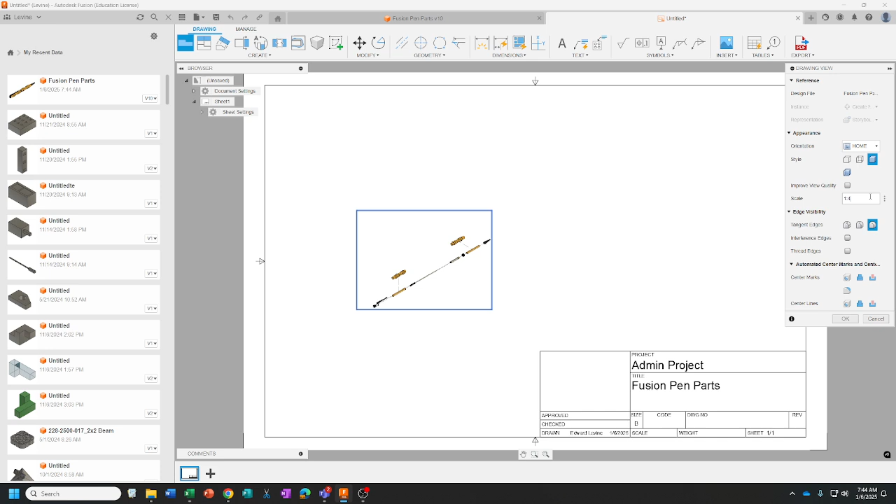If you've ever done an assembly from a set of directions, you'll have received something that looks like this. I'm going to make this a little bit bigger. Whatever paper size you're using, try to use the extent of the paper, but this is not going to work because that's too big. I could try to shift it, but we need to leave ourselves some room. Try to stick to whole numbers here.

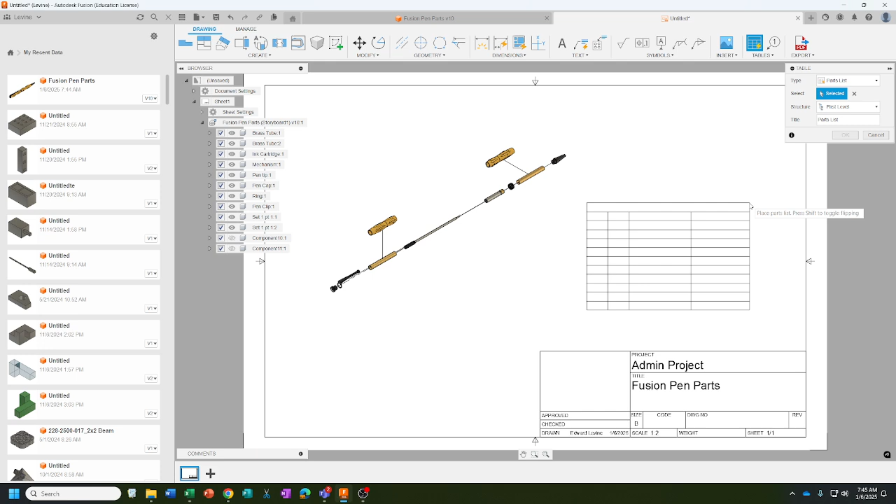Okay, so I'll go with this, and then it should get a little prettier. There we go, so it goes a little bit nicer. Right here there is a table, and this is an automatic table, and I love this. If you did everything in the previous steps, what you should get is all the parts labeled and the materials explained.

So I did want you to try to change some of them. At the very least, as far as points on this, I do want the brass tubes labeled as brass, and then everything else we can call steel, except for the handles.

So let me change these ones. This will be how you change it. A couple of things: it's called component 10 and 11. Nothing should be just called component, and the material is wrong.

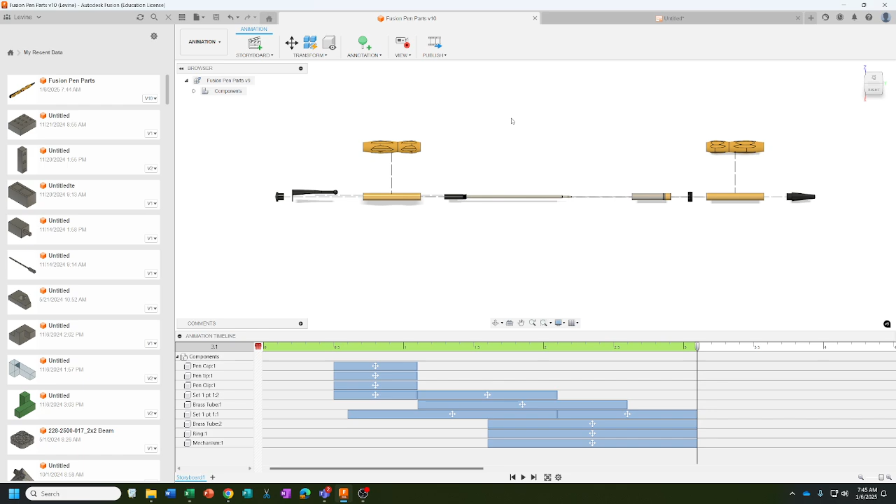Let me go back to the actual file, back to the design. If I click on, let's see, what did I say, 10 and 11? Oh, you know what, those are the ones that were invisible. So where are the handles? Pen part 1, quantity 2.

Let's see here. So if I go to the body and go to physical material, it's going to ignore the texture there for a bit. The physical material, again, is not what it looks like necessarily -- it's what it's made of.

Technically these are made out of PLA. I don't know if PLA is on the list of materials. PVC, no -- it would be somewhere in here. As long as we call it some type of plastic, I'll be okay with that. So I'll just call it ABS. Is ABS there? Yeah, so ABS, we can call that.

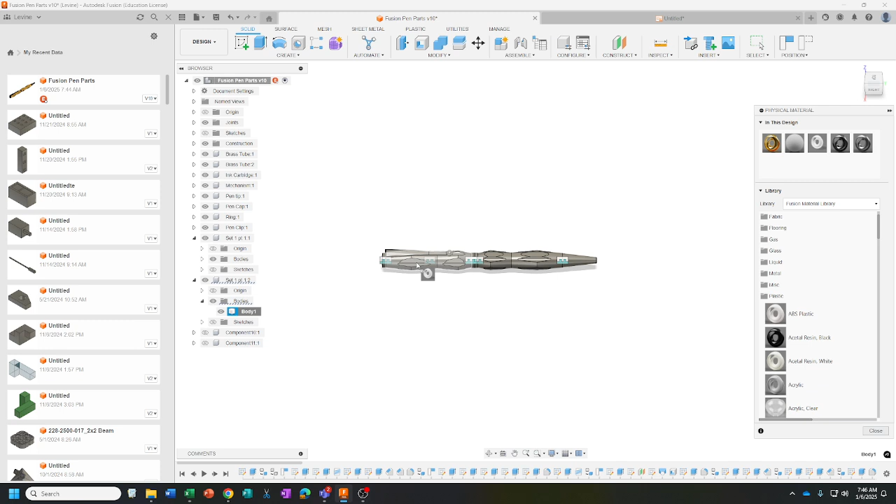And then that took on the same material -- somehow those got linked. Now you notice it goes back to the color because there are two different things about a material it pays attention to: one is the material, one is the appearance. The appearance is this orange color because I was trying to match the plastic I was intending on using.

But now if I save this and say OK, this is going to give me an error message and an asterisk and all this stuff. There's this little link button up here -- if you click on that, it should update stuff and things should shift a little bit. Now I can see that's updated.

Now I don't like that name, so I'll go back again to my design. I can't remember why it was called that. If you double click on the name, a double left click, it should come up. So I'll just call this pen handles.

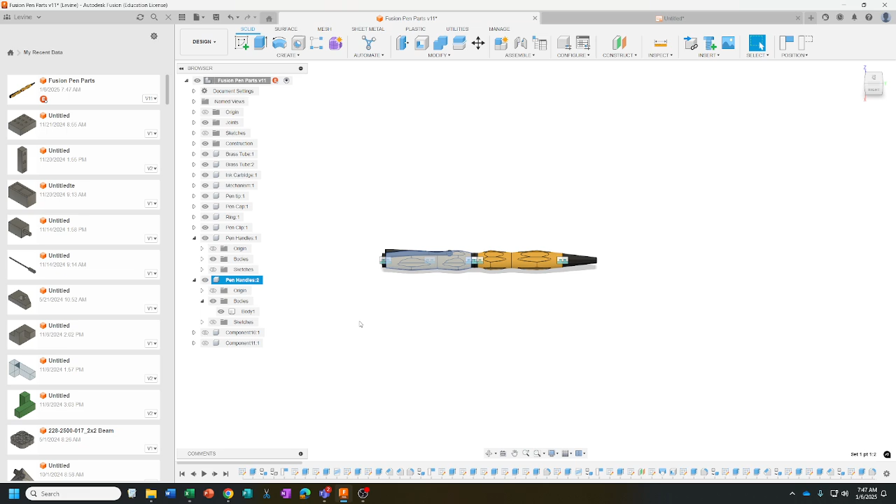If yours are 1, which they should be, I'm actually not sure why mine are being weird here. Again I get the error message because I updated it and then did this. It's only going to give you that error message if you hit save. Now you will have your other ones in the list here -- I can see those are the ones that are hidden. Let's see if we can modify this.

So let me double click on my table. Okay, so I want the names, I want the material -- the quantity for all of yours really should be 1. Let's see, table direction, all levels, first levels... alright, never mind, we'll just leave it.

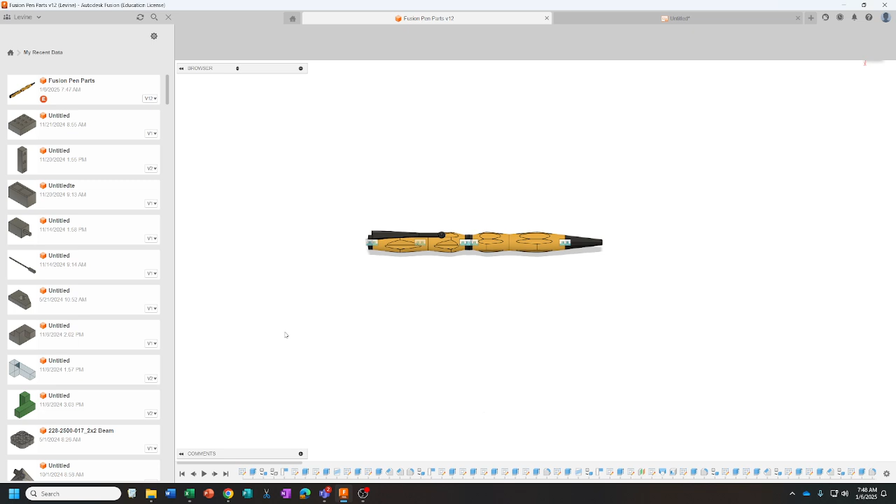But try to make sure everything has a name. So I probably should go back in and just give these names, because these are the ones I didn't use -- like pen handle 1, pen handle 2, so at least I can see what they are.

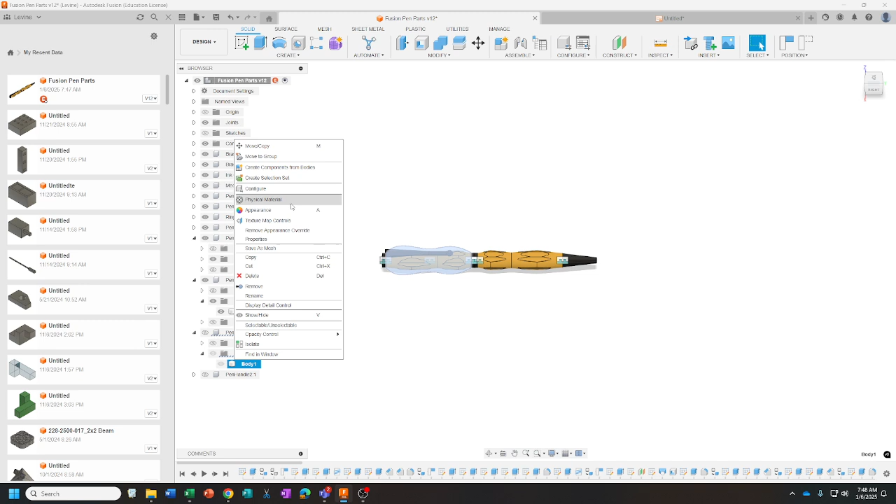And you can even go here, even though it's not visible -- it's still letting me go in. You have to go to the actual body, down into the file list to find the body, then physical material. I should probably turn them back on so I can actually target them.

And then I made the other ones ABS -- I'll just make these handles ABS too. We'll just pretend ABS plastic is what we use to print, which we could have. It's just a different material that we just don't tend to print with.

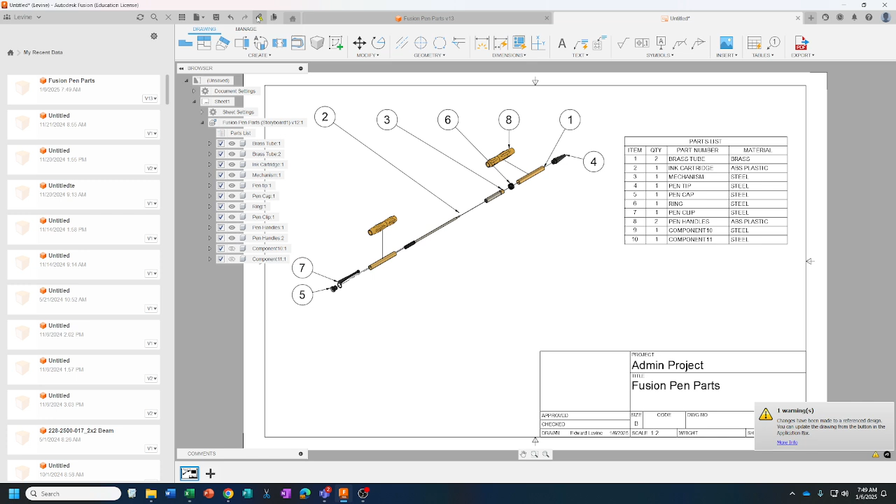And I'll hit save. If you don't hit save, it won't give you this option to update. Go over here, gives me a warning again -- hit the chain link, hit the chain link. Okay cool, I think I dragged the wrong one, but let's look for yours to be correct.

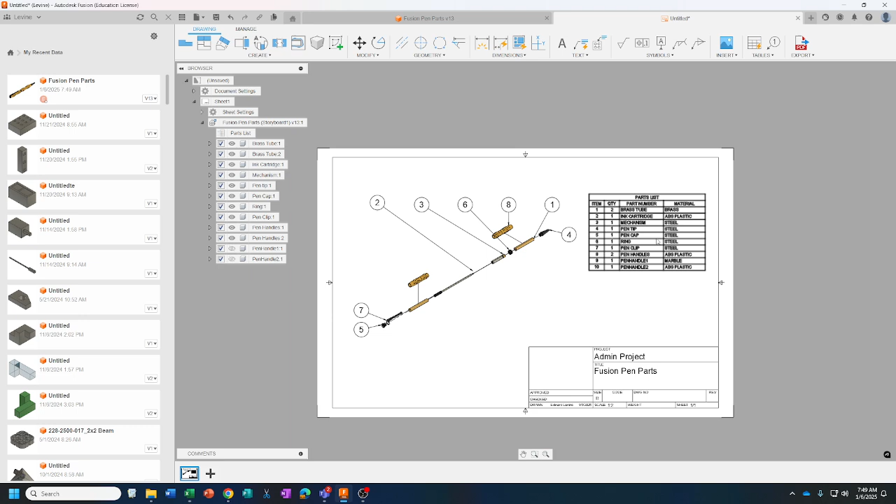So for what I'm looking for with this view -- this is the exploded view with parts, so it's an annotated exploded view. These are the annotations, this is our parts list. I want to see that your brass tube is brass, that all your parts have names, and that your pen handles are a type of plastic.

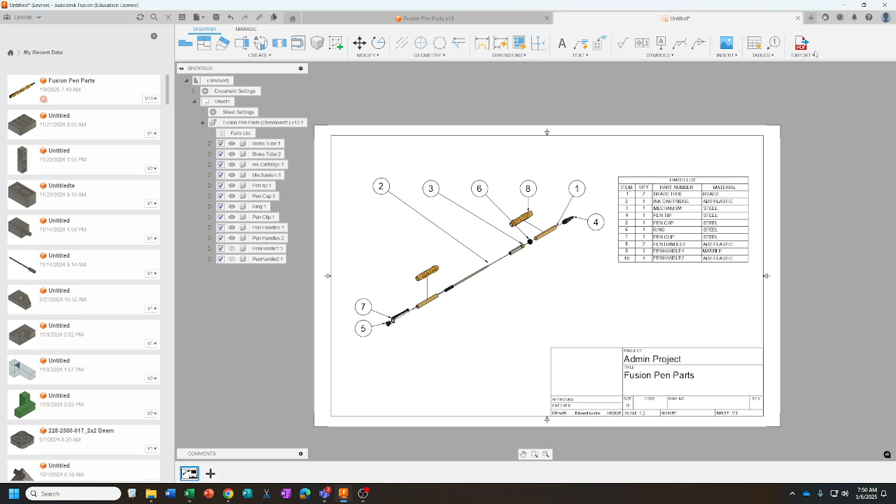Yours should not be marble, so I wouldn't advise trying to screenshot mine -- do your own, and make it so your handles are actually plastic. When you're done, there's an export PDF button. Use that because it gives you the highest quality version of this drawing, and that PDF is what you'll submit for the annotated exploded view. And that's it.